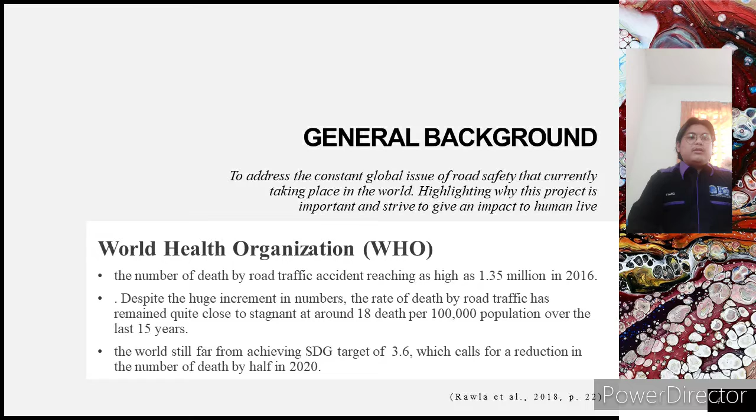Our background of study is the driving simulator. So driving simulator is a great tool for simulation to simulate a driving behavior without creating hazardous environment.

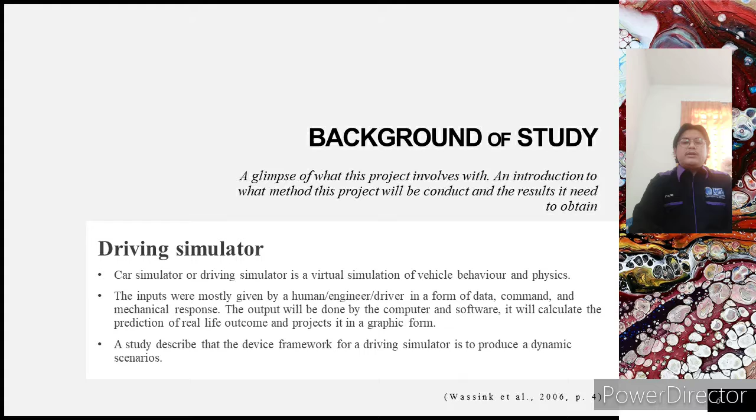So our problem statement is the distraction and lack of focus were some of the reason on how road accident happens, but how much depth of knowledge do we have over the situation? Most of the related situation can cause extreme damage on the vehicle and be fatal for the driver and passenger. So not much of data we could collect post-incident for future references and improvement.

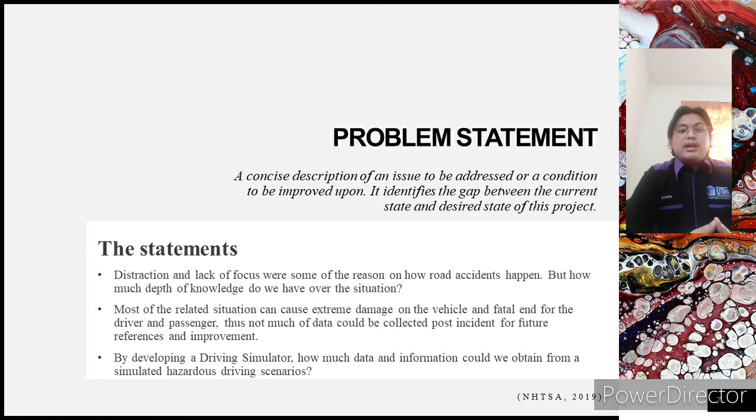So the objective of this project is to develop a driving simulator that can give out steering performance data. Then to develop a simulated scenario that can be dangerous to be tested on a real road situation. Finally, to study and investigate if driving with speed under certain scenario that require cornering or evasive vehicle maneuvering can affect the driving performance.

So the scope for this project is the simulation experiment is limited to static simulator, as that is the only simulator available. The maximum amount of participant is 11 person. Then participant is limited to young drivers, which is 18 and above and below 30 years old. The data that will be studied from the simulator is the input data of the steering that will be used by the participants.

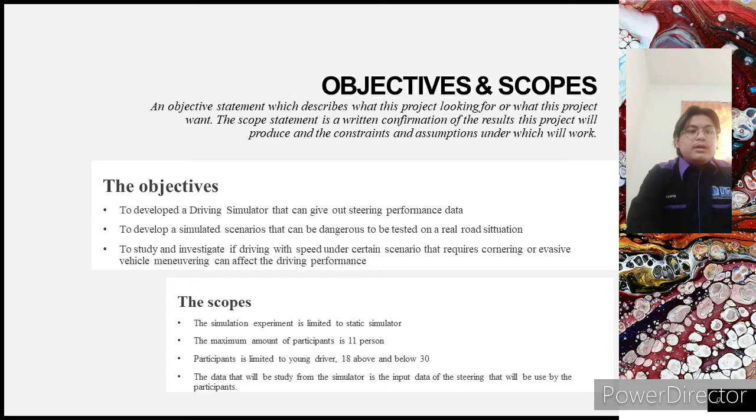So we're gonna continue to chapter 2, which is the literature review. So we're gonna have a quick glimpse on the past study. So of course the overview. Basically our past study on driving behavior, reaction time, road safety, and of course the simulator itself, the driving simulator.

So we're going to continue to chapter 3, which is the methodology. So of course every project begin with project planning. So some of the plan consists of materials gathering, driving simulator research, and making project flow charts and Gantt chart.

So for driving simulator test, the experiment design is it will be divided by 3 tasks, and these tasks evaluate driving simulator steering performance and behavior. So the focus is to analyze the steering control. So the first task is the cornering test, which is a track with 4-way intersection. So this track is a closed circuit, like the number 8 track with an intersection. So it will test and observe how a person take a sharp 90-degree corner.

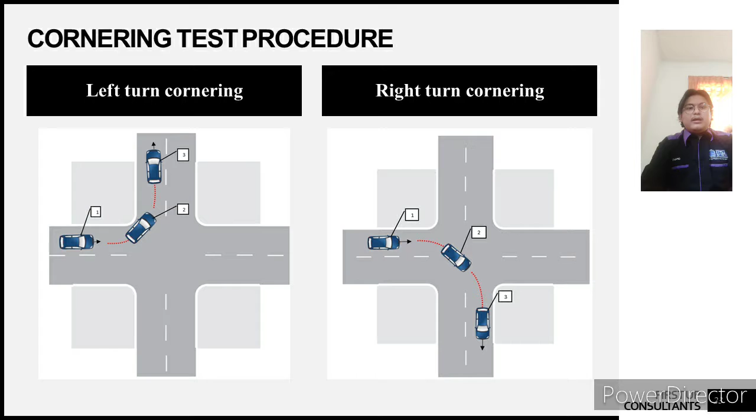So the next test is the obstacles test. So the obstacle test, as its name says, is to avoid obstacle. So the car will drive in a straight line or straight road, and then an obstacle will be there, and they need to avoid this obstacle.

So as you can see, we will start taking data at number 1 and stop collecting it at the end of number 2. So that's the place where the data is taken, which is same as the cornering test, the beginning of the avoid maneuvering and the end of it.

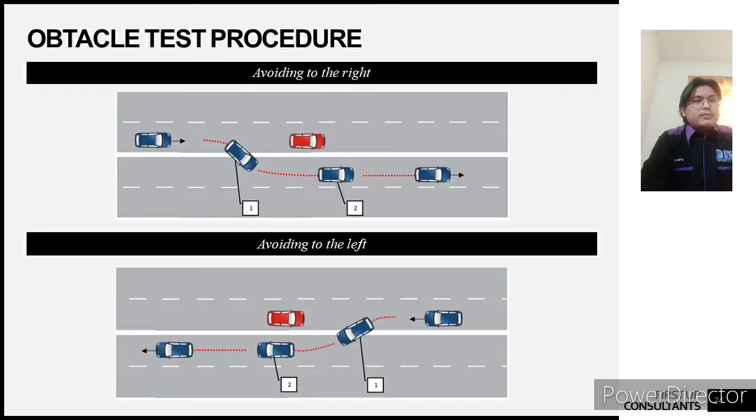So as you can see, the situation for avoiding to the left is quite the same too. And then the third test is the lane changing test procedure. So lane changing will be done continuously: it will start at number 1, where the car drives in a straight line and picks up speed. So during number 2, it will

start changing lane. So at the beginning of lane changing, when they start shifting the steering wheel, the data from the data log will be taken from there, until just before they start to move straight again. Number 2 is how they change lane to the right, and number 3 is changing lane to the left, and the data collection process is pretty similar to number 2.

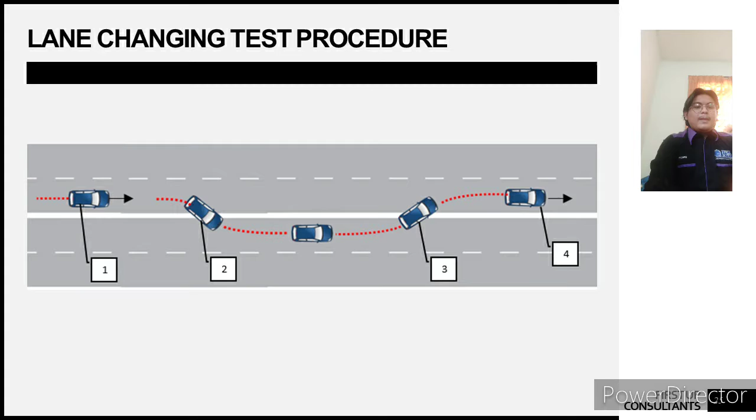So we're going to continue to chapter 4, which is the result and analysis. This chapter presents the result and analysis of the development of the driving simulator and the data it can harness for research purposes. The raw data obtained from the simulator data log are to be processed and calculated with the help of Microsoft Excel. So for this project, Microsoft Excel was used to analyze the data.

Tests involving 11 participants were performed to demonstrate the applicability of the proposed driving simulator system. As the objective, this project is to show what information can be obtained from the simulator itself.

So first, the first analysis this project did is the steering angle analysis. The steering control is the Thrustmaster TX racing wheel. To skip ahead, the data output from the data log is given as a value between 0 and 1. So it will move from 0.1 and below up to 1.0, and 1 represents 100%. So in the end, all the results obtained from the data log will be multiplied by 100%, or by the angle itself, to find the real angle of the steering wheel.

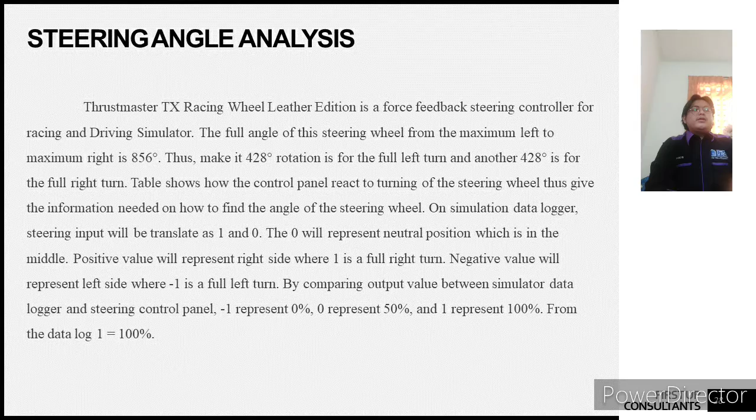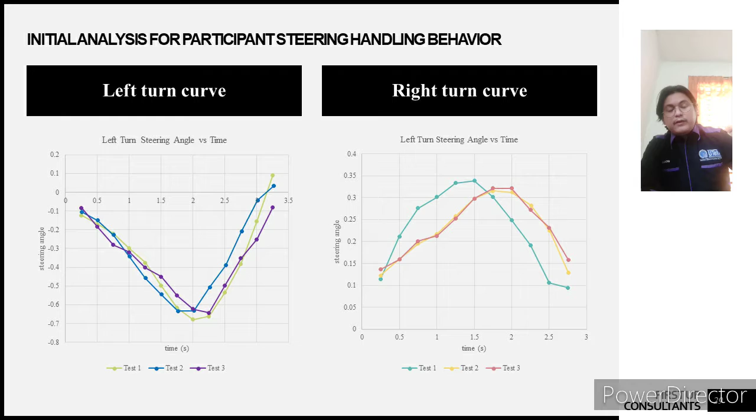So the initial analysis is of participant steering handling behavior, based on all the participants' data logs and all the tests they have taken. So this analysis is by participant. As you can see, this is the steering curve for the left. The value is negative because negative represents anti-clockwise movement, and positive represents clockwise movement.

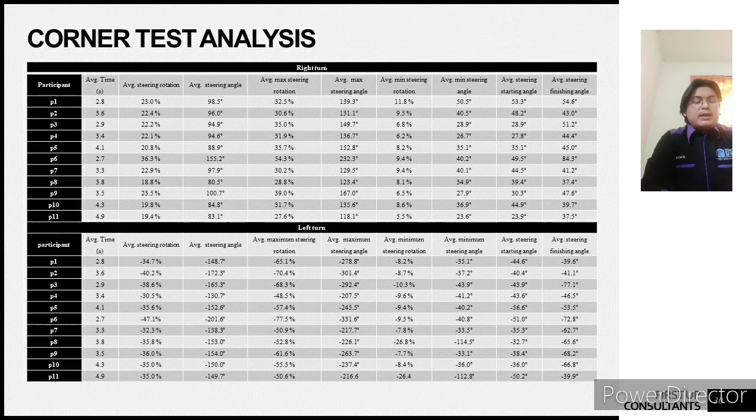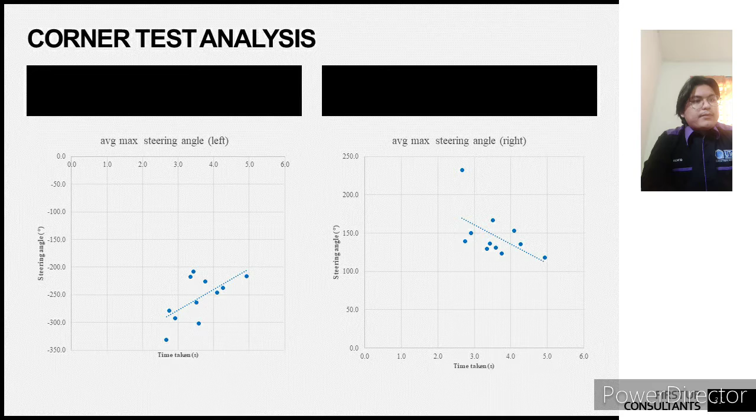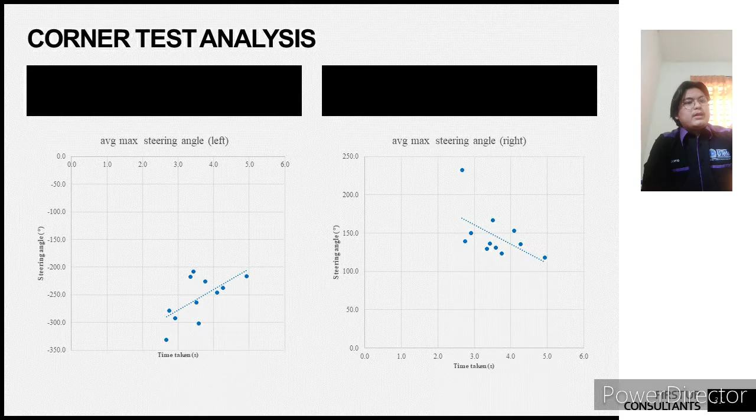This is the result of the corner test analysis. What can be found here is the quicker we take a corner, the higher the average steering angle, or the higher the maximum steering angle we use. The trend can be shown here from the scatter graph, where we took the average maximum steering angle. As you can see, for left and right, when longer time is taken, less steering angle is used, and when less time is taken, the steering angle is higher.

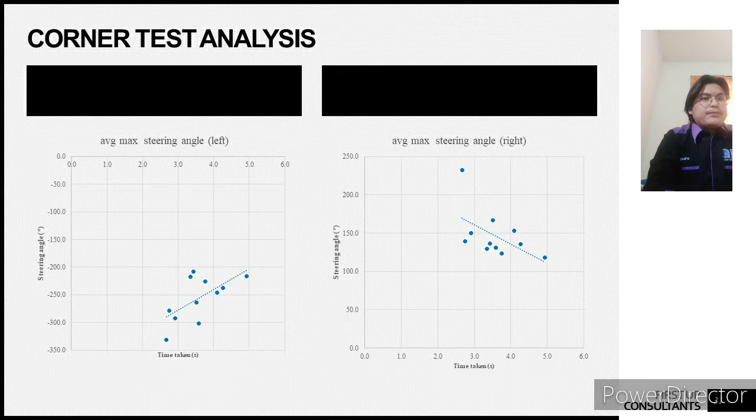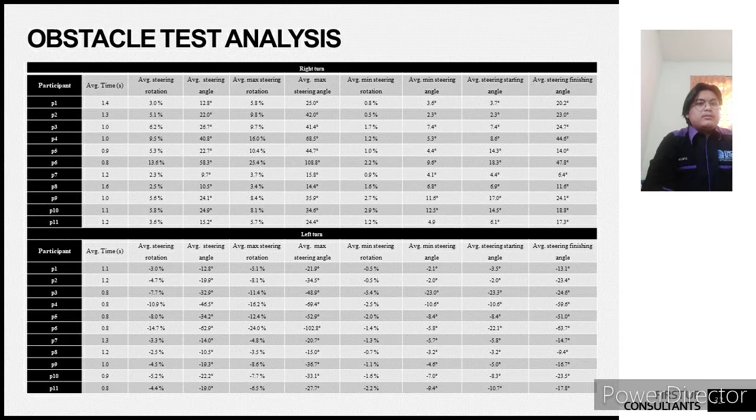This is the obstacle test analysis. As you can see, obstacle tests have a lower average time, because the car moves at high speed. It gives pretty much the same result: the lower the time taken to do the maneuver, the higher the steering angle.

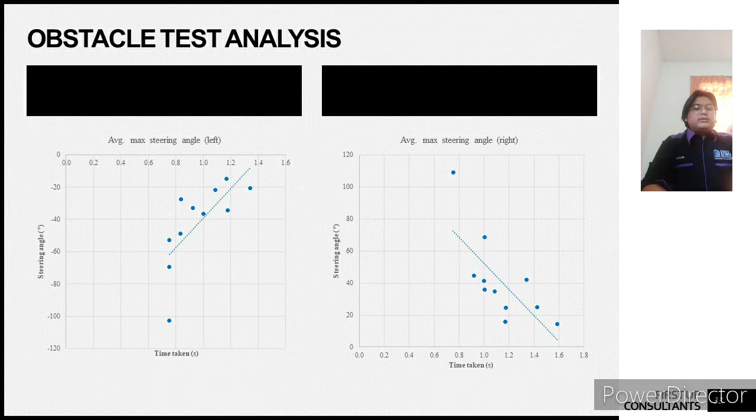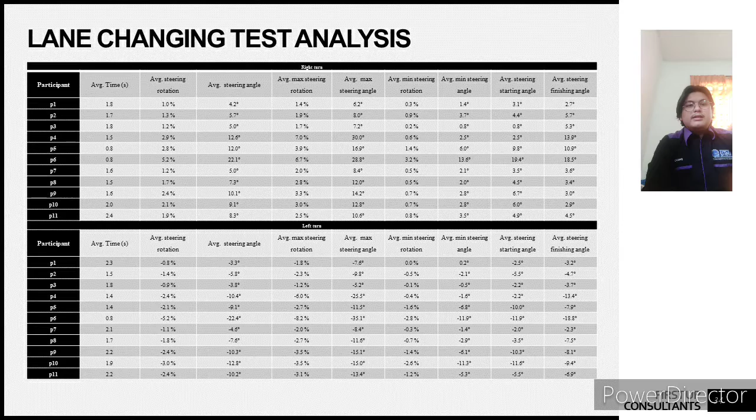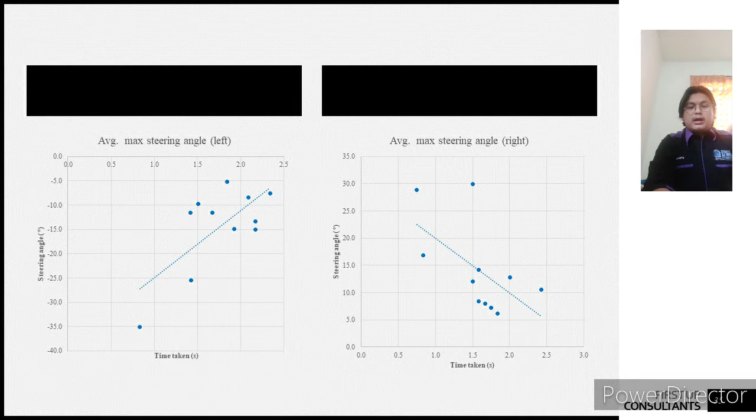And this is the result and data from the lane changing test analysis. Left turn, another scatter graph. Each of the results demonstrates a pretty similar pattern: the less time you take cornering, or the quicker you corner, the higher the steering wheel angle, meaning you turn the steering wheel much more, which is not very safe.

So we're going to continue to the conclusion. The number of road accidents and fatalities is currently still high globally and locally. Reaction time is important during driving and could be the key to avoiding accidents. Certain behaviors or actions during driving could affect reaction time. Initial results prove that the average reaction time obtained correlates with some past studies. And driving simulator research could obtain more results from a safe environment.

For me, that's the conclusion we had, which answered the objective we were trying to achieve: to obtain results from a driving simulator and create a dangerous scenario. So the project obtained results without risking any casualty or injury, in a safe environment. And that's the purpose of this project, to create a safer environment to study dangerous driving behavior.